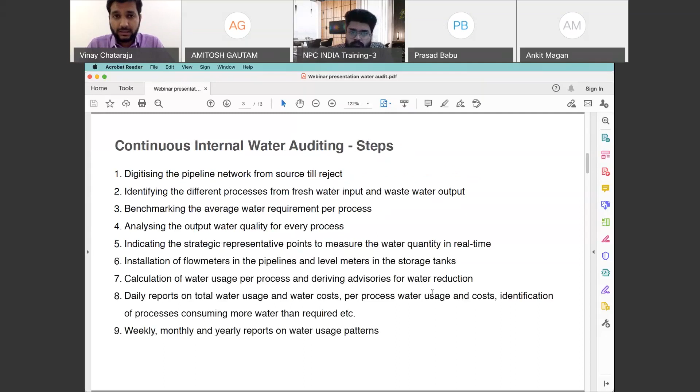So we want the industries prepared and not panic when such kind of regulations come. Those are the reasons why the industry has to do this. So the steps involved in this continuous internal water auditing are many steps, I'll go through them step by step.

So the first step which we feel is a digitizing of the pipeline network. When we have seen the industries, we asked, okay, why are you not monitoring the water?

The piping network itself is very complex, since they haven't constructed the whole industry in one go. They have been upgrading step by step. Ek borewell khatam ho gaya to dusra borewell dig kiya, dusra khatam ho gaya to teesra dig kiya. So they have added more sources, then added a treatment plant, one more unit of boiler, one more unit of power plant. So they have expanded step by step.

So the first and foremost thing we felt was that we need to have a digitized pipeline. What is the source of water, which pipeline is going from which part to which part, to get the data digitally. What is the diameter of each pipe, what is the pump capacity. Everything has to be in digital format to build anything on top of it.

This is usually done with a simple survey. We have approximately taken 7 to 10 days for a medium-sized industry in Kanpur to bring the entire pipeline, from the source to the final output, into a digital format.

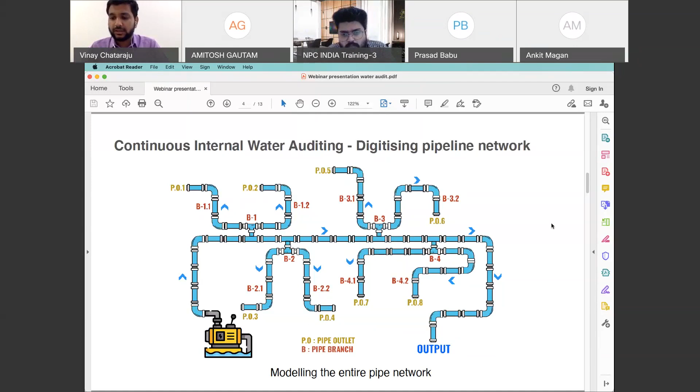Next is classifying the processes. Broadly, what we observed was there are 5 to 10 major processes any industry would have. If it's a very big industry, there would be bigger processes, but maximum 5 to 10 processes. If you take a tannery, it will be like washing, cleaning, pickling, and drying. So there are a few steps involved in it.

So the first thing we need to do is classify each process. This is process 1, process 2, process 3, process 4, process 5, process 6, which are using water in their processes. And clearly segregate this as the input pipeline and this as the output pipeline for this process.

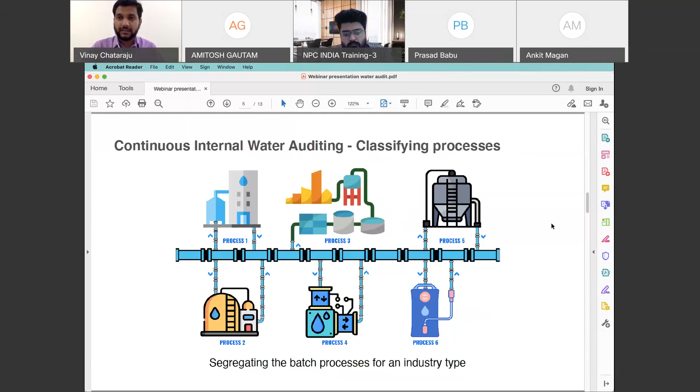This will be completely independent of the industry, so it will be difficult to give a common notion for all industry types. For a tannery it will be different, for a textile, for a paper, for a pharmaceutical, it is all going to be different. So as an industry expert, people will be able to identify how to classify processes.

The next step is benchmarking the water needs. As per the design capacity, since all these processes have evolved over a period of time and the industry has been running for multiple years, they would have some benchmarking for each process. For example, if I take the pickling process in a tannery, for each batch of some XYZ tons of leather, this much amount of water has to be added.

Or for each process in a boiler or in a specific process, we can benchmark approximately that this process is going to use around 10 kl, 20 kl, 500 kl, 100 kl, whatever it is. So we need to benchmark each process: what is this ideally supposed to consume per day if you're talking about daily average?

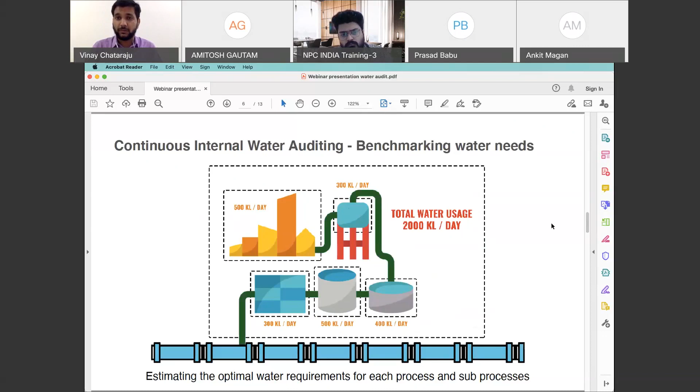This again depends from industry to industry. As industry experts or process experts, we can capture the data and benchmark, saying that ideally, as per our usage, this process is supposed to consume this much. That's what we need to benchmark for water needs. Third, output water quality needs to be measured.

Often different processes release different water quality outside, and they mix all of them into a common treatment plant and try to treat them together. For better reusability of water, we recommend having the output water quality from each process checked, with common parameters like pH, conductivity, DO, turbidity, BOD, COD, or even anions, cations. The overall water quality profile has to be benchmarked for each process.

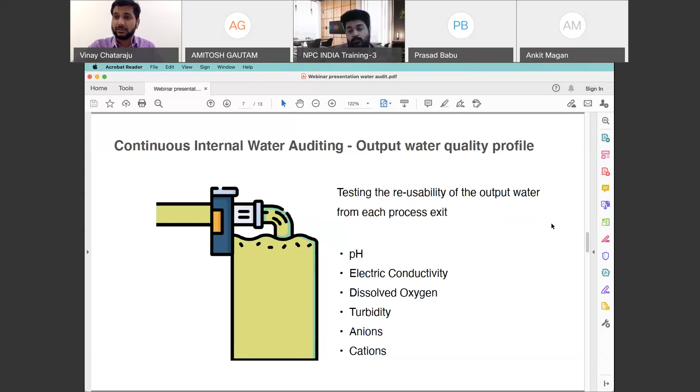Once we have this water quality data, it will be easy to say that this particular process does not have much impurities, or this particular process output can be reused for some XYZ process. So that's what we need to benchmark on water quality. Now, once we have some benchmarking of how much water is required, we need to go for installation of these meters.

So if we install this meter, we need to have this data captured online. We have seen many industries install these flow meters, good quality ones, even international brands like Siemens, ABB, Krohne Marshall, and others.

But what we observed was that they are not able to use the data. The meter is the actual gold mine. The meter is actually the data bomb they are sitting on. We need to have as much fine data from these meters as possible for the analysis.

If we do not capture the data on a daily basis or an hourly basis or as per time intervals, and just calculate the cumulative, this is not going to be of much help for the industry without the finer amount of data. So we keep getting the data continuously.

In some places we have seen people write it manually. They have a logbook, so they come twice or thrice a day and write the readings in the logbook. We observe that they do this analysis once a year or once a month or something, but again, it has not been very efficient.

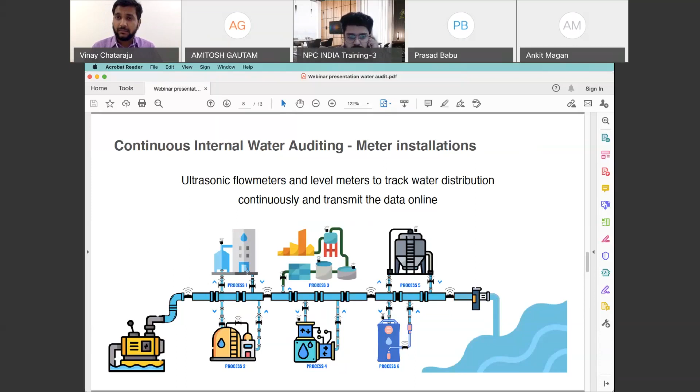So we recommend a continuous online automated data collection process from all the processes wherever the meters are installed. Now it is about the analysis part, so a live dashboard for water budgeting is what we provide.

This data which is being captured from the industry has to be made available to the respective people at the respective times. Again, what we have seen is even big organizations and governments captured the data.

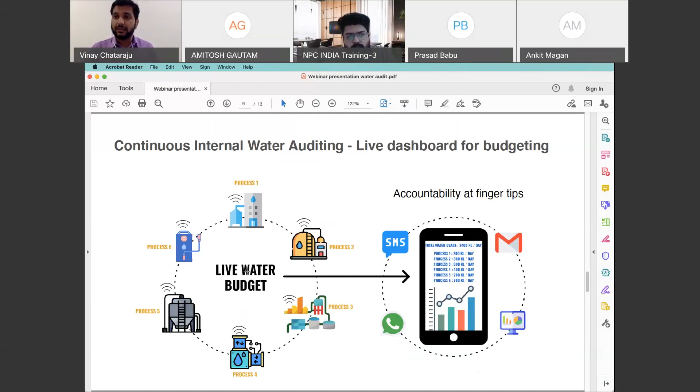Okay, so now we are able to identify the motor needs servicing. So these are the kind of benefits the customers expressed that they are having. So here, finally in the analysis, these are the various things which we capture and then provide.

Total pump working hours every day. The meter which we install, one of the unique propositions we offer, is along with the cumulative flow, we also capture the total working hours. We also identify how much hours the pump was running. So empirically, if not accurately, we are able to calculate what is the cost associated with pumping the water from the submersible or any pump.

So we have the volume, we have the working hours, which tells us at which time to which time the industries are able to work. So in a particular process, it has used 10,000 liters. But at which time? Is there any peak? Is there any peak hour? At a particular point of time, is our consumption so much higher?

So we are able to classify them on the hourly basis, and say that you are using this total for, let's say 5 hours. This instrument was supposed to run for 3 hours, but it ran for, let's say 4 hours. I identify process inefficiencies. What is the inefficiency in each process?

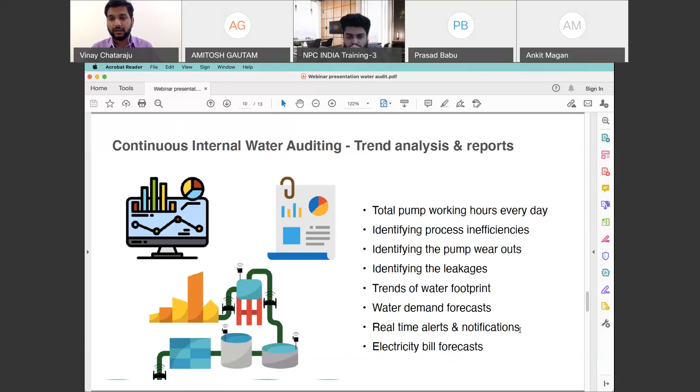Identify the pump wear outs. So it's kind of a debugging unit for the efficiency of the pump. Identify the leakages, trends of water footprint, water demand forecast, real-time alerts and notifications, and electricity bill forecast. Of course, only for the equipment associated with water is what we are looking at in all these analyses.

So these are some of the dashboards, photographs which you can see. As you can see on the left side, we have this WhatsApp portal where we send daily messages directly on WhatsApp, where they can interactively see what is my consumption for, let's say, process 2, process 3, process 4, compiling a report on a daily basis and sending it every day in the morning at 8 o'clock.

Before I start my day, I get a report for my previous day saying your performance for yesterday has been this much. So today you will instruct, okay, there's too much inefficiency happening here, please have a focus on this.

So this is how we do it, and we of course have a web and mobile dashboard, and we also integrate this with any third-party dashboards. Often they have ERP systems or SAP systems which they monitor. So we integrate this data to them so that their process is automated.

Billing, invoicing, and everything. So this is the flow meter which we have developed. Ultrasonic transit time based flow meter. Currently we have 2, 4, and 6-inch diameters available, which are very commonly used pipe diameters for the industrial market. And we have both battery as well as mains operated meters, but generally we recommend battery operated because the mains have chances of tampering. So the battery operated flow meter is called a tamper proof flow meter, which is again recommended by the Central Groundwater Authority to be installed at all bore wells for all industries and all bulk water users.

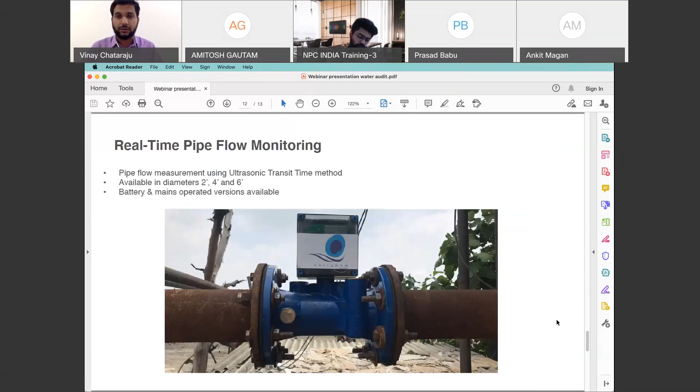So thank you, Mr. Vinay, that was an amazing talk you gave. I'm from an electricity background, and when you compared the water scenario with the energy scenario, I could really resonate with your ideas.

I had this question that in energy we have something similar to what we call economic load dispatch, where you dispatch the amount of electricity based on the demand. It's very optimal, controlled, etc. So now, with my experience in water audits, I have not seen any such system at play simply because there is no data-driven mechanism. Have you explored this area? What is the optimal amount of water that will be extracted from, say, 3 bore wells for 1 day's demand or something like that? It depends completely on the capacity of their borewell, capacity of their pump.

Unlike electricity, here it is completely pump driven. We have seen people running the pumps 24 hours a day from multiple borewells. There are industries who are efficiently working with 2 to 3 borewells, going on turns, basically running for 2 hours and then again for 2 hours. We have seen all types of industries.

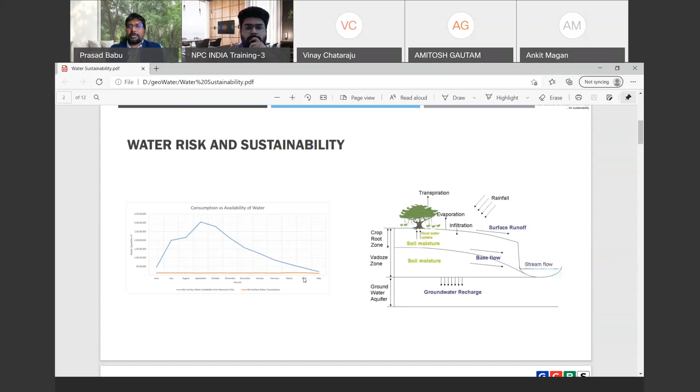So we have to understand that this is a crucial period for the industry to survive in this scenario. This is how we build the scenario.

We don't look at the industry as a single unit. We always look at it from the watershed perspective, such that the industry has competitors - you are not the only one using the particular water resources. You have competitors within the watershed, and you also have other users apart from industries. You also have natural biodiversity, which also requires water, and the environmental flow also demands water. And the aquifer also demands water.

The aquifer is not meant for withdrawing everything that exists in it - it has to be maintained very harmoniously. So what we do is look at the watershed in such a way that we build scenarios by utilization pattern from all angles, not just for current scenarios but also the futuristic scenario.

For example, in this particular chart, you can clearly see the balance available in this particular watershed. Over the period of time, for a few months it looks very great, but for a few months it is in the negative. This doesn't mean the industry is not surviving there, but definitely in the future, the watershed may have a different kind of scenario.

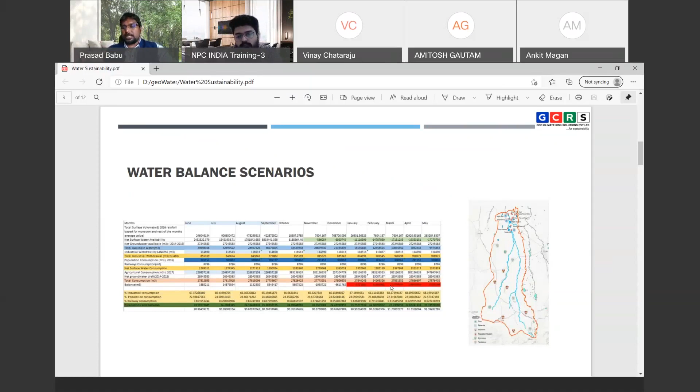I will give a few examples of how we calculate scenarios. Scenario one is, for example, the population water consumption scenario calculated as per the standards the government suggests - 135 LPCD is the standard, but in most parts of India, we don't use 135. Eventually, maybe after 5 years or 10 years, there could be a chance that in that particular watershed, because of changing lifestyle, people may use that 135 LPCD.

In that case, your water availability will be okay for a few months, but for the rest of the months, it will be like putting in some water and taking out the entire complete water.

And the second scenario could be the rainfall. Considering the maximum deviation, if you look at the maximum deviation in most of the drought prone regions of India, you always have deficient rainfall. So that again affects availability of the surface water.

Another scenario we can look at is agriculture, how it is changing over time. In this particular case study, we have seen a shift from traditional crops to commercial crops, which means they demand more water. We cannot ask the farmers to change the crop because you are running an industry, so we have to act in such a way that we look at different formats of the watershed.

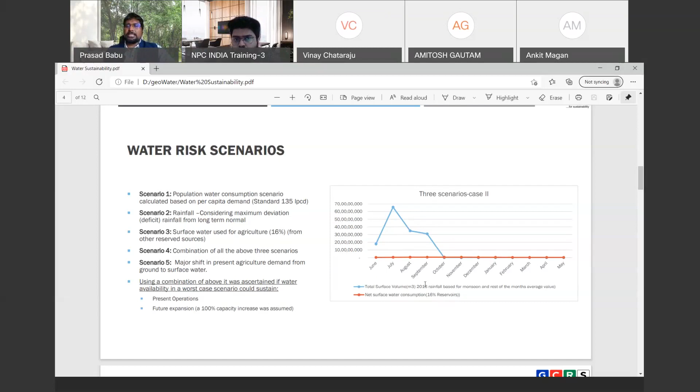If you look at the combination of all these scenarios, as I said in the first slide, for the first few months, like from June to October, the gap between water availability and water utilization is fine. But as soon as it comes to the lean period from October to May, it is almost equal - whatever water is available, either in the groundwater or surface water, there is no positive or negative balance, the gap is almost zero. So we understand every industry or industrial watershed in this manner, so that the industry can survive or sustainability can happen.

Looking at this particular example, one has to plan a water security plan not just within their industrial unit, but also beyond it. As per the ISO standards, we have to look at the water availability in the entire watershed, and how much is utilized by the individual industry as well as other actors within the watershed, like competitors, and look at the balance.

Budgeting is very important too. We have to look at projections for the future, and also the water security plan on the demand side and supply side. While you change the process within the plant, as the previous speaker Vinay said, changing the metering and all that will give more impact within the plant. But you also have to look outside the plant - what is the demand by others, and also what is the supply.

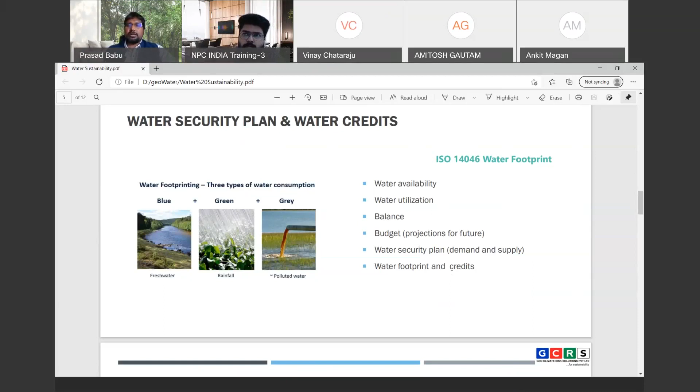So how do we achieve this - one should follow sustainability stewardship. These are the four key drivers we suggest for the industry. One is future proofing, as I said.

Looking at all the business verticals, either in the corporate or within the watershed, they should look at all the elements, not just water, because biodiversity and other aspects of the watershed also give an indication of whether the watershed is surviving or not. So in a way, we have to look at the holistic environment in a watershed.

Looking at the circular economy, like the previous speaker mentioned, reusing and reducing water consumption is always a better option. Importantly, all corporates and industries should have a goal, meeting some of these national and international goals. That will be the key driver, so that you have an agenda in place to help you achieve it. And finally, every industry should have this sustainability stewardship within the industry as well as within the groups.

We can follow a smart approach - you should have a very specific plant, watershed, or ecological approach, and it should be measurable. As I said in my previous slides, every drop available within the watershed, as well as the consumption, should be measurable. Only then will we be able to know whether we will survive or sustain for the future.

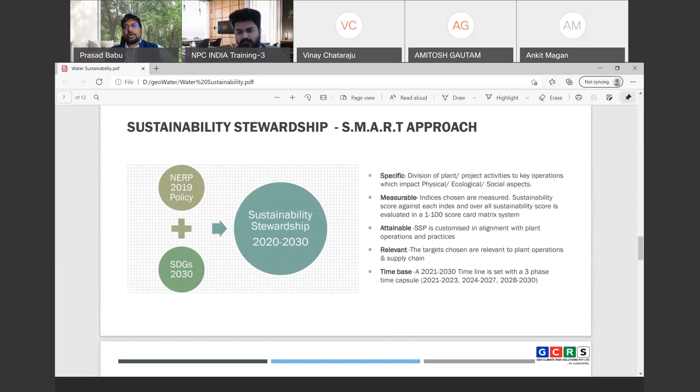Both the government and global indicators, whether it's the national resource efficiency policy by MOF 2019 or the SDGs, all talk about sustainability, and we can always use that as a better approach.

As a company, as introduced by NPC, we are a solution provider in terms of environmental sustainability. We operate within the geospatial spectrum, using geospatial technologies for water conservation and water use efficiency approaches, giving solutions to industry. We are a startup.

This is our journey so far from 2014 to 2020. We are Startup India recognized, and incubated in Andhra Pradesh. We also have an R&D center at IIT Kanpur, and we are GAIL funded. GAIL is our stakeholder. We also have a couple of international MOUs, notably one with Mekorot, the Israeli national water company.

This is our product, how we give solutions to industry. For existing industry, we provide water risk information, as I mentioned in the previous slide, and also sustainability. We develop scenarios through the tool so that industry can look at mitigative and adaptive options within their watershed scenario.

Similarly, for proposed industry, we look at the risk and suitability. If new industries have to come up, we provide suitability information so that they can act accordingly and have an alternative solution.

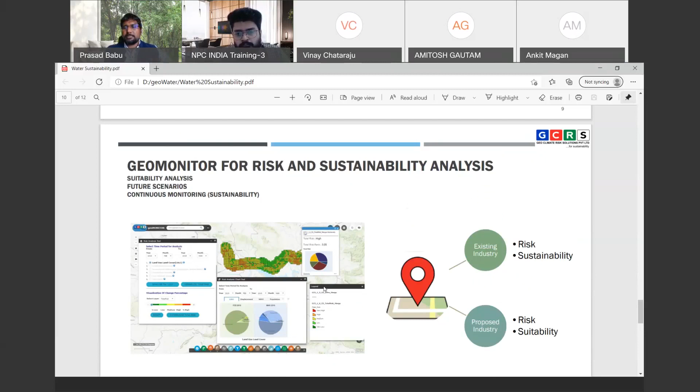This works on a geospatial platform. We bring in a lot of satellite data and other secondary data, and the analytics operate behind the scenes. For every location, we generate smart reports that can be readily used by industry.

We also have another component of the same solution, where the user can directly generate a report as per the Central Groundwater Authority's new notification, covering all 10-11 parameters. The user can easily download the report as and when required, and the data keeps updating.

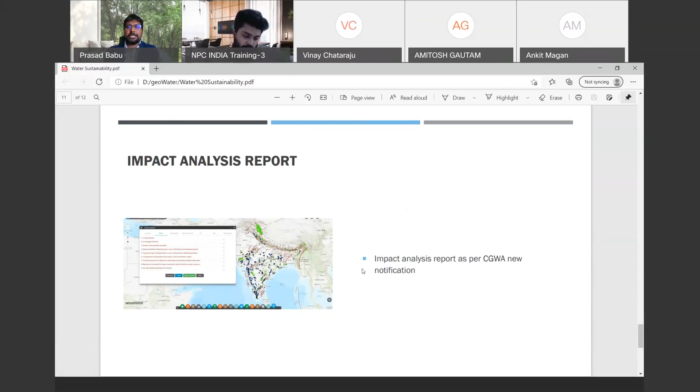Thank you, sir, for your talk. I have one question about the sustainability scenarios you mentioned for proposed industries. Do you do contingency analyses, as in what is going to be the deficit in water supply later on, etc.? Can you shed some more light on that?

As I said regarding deficiency, we understand everything at the watershed level. We build scenarios using historical data to understand the current scenario, and based on historical and current water usage, we build a futuristic scenario, as I mentioned in the case study I presented. In that watershed, we try to understand the future demand by industry under business as usual, and what the future water usage, utilization, and availability could be.

In this particular watershed, historically farmers were growing traditional crops, consuming less water. Now the scenario has changed, they've moved to commercial crops, and I'm sure in the future they will continue growing the same crops, whereas the total water availability remains the same.

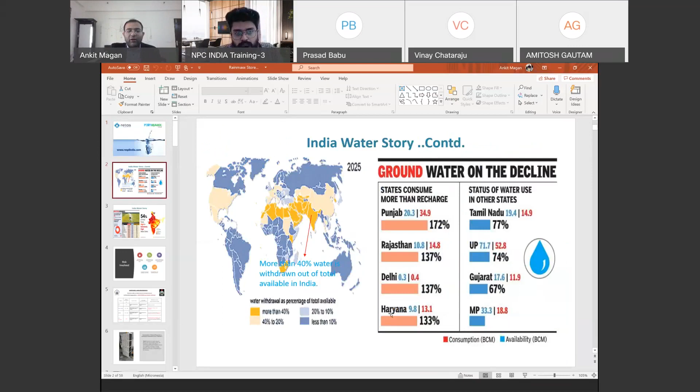So moving on to the presentation, I hope my screen is visible. Yes, sir, it is visible. This is the story, which I'll not spend much time on, because previous speakers have already explained all these things in detail.

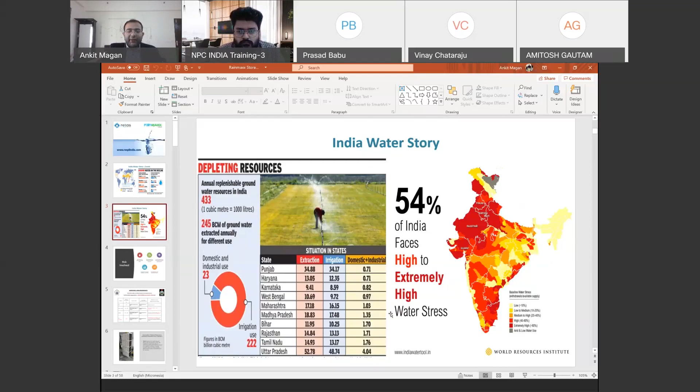As we know, agriculture consumes the maximum amount of water, then industries. There are various practices that NGT has started along with Central Groundwater Board and Ministry of Jal Shakti, where we will have better equipment to reduce water requirement, with various methods to reduce water consumption.

So what is the risk as of date? It's basically groundwater depletion. You won't believe there are a lot of factories in Gurgaon planning to shift to other areas because the water quality has deteriorated and the water level has depleted. Now they are shifting, but they were involved in depleting the water and deteriorating the water quality.

Through rainwater harvesting, few industries were putting back their liquid waste inside the earth. So now the risk is so much that if industries shift, the whole employment and whole cost of the city will change.

Then we are highly dependent on surface water availability, and believe me, it's not a permanent solution. If we are not sustainable today, it's not a permanent solution. There can be day zero in Gurgaon, there can be day zero in Bangalore. Chennai faced day zero, but the number of rainwater harvesting pits that Chennai has is amazing. Since that was not maintained, that is one of the reasons there was day zero.

There's a report which says if 57% of buildings do proper rooftop rainwater harvesting, then there will be no day zero in India.

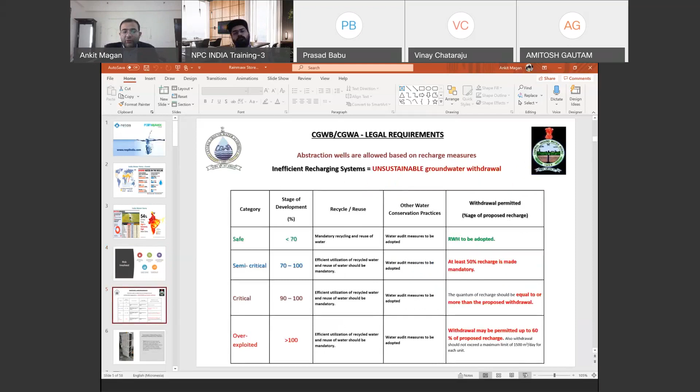So now the change in future rainfall pattern is the worst problem, affecting agriculture. Central Groundwater Board has divided India into zones - now there are 5 zones: safe, semi-critical, critical, overexploited, and notified zone. Wherever we are sitting, it's basically under the overexploited zone.

If you are extracting X liters of water, you have to recharge at least 2X of the water. How is it possible? Because you have limited rain, limited rooftop area, plus the requirement - let's say if you have a paint shop or a textile mill, you have huge requirement.

So what government has proposed is that you can have a rainwater harvesting system within your premises, plus you can adopt various ponds in different villages after getting the Khatauni and Khasra number, and get rainwater harvesting done there. This is the easiest way of doing rainwater harvesting, by adopting a pond, but no one is monitoring the pond and its usage.

That is one of the reasons we were earlier talking about water meters - that needs to be done for all kinds of ponds also, because industries are adopting these ponds, but no one is monitoring the amount of water getting recharged. Either you can have piezometers installed, so at least you will have a basic idea whether we are working in the right direction or not.

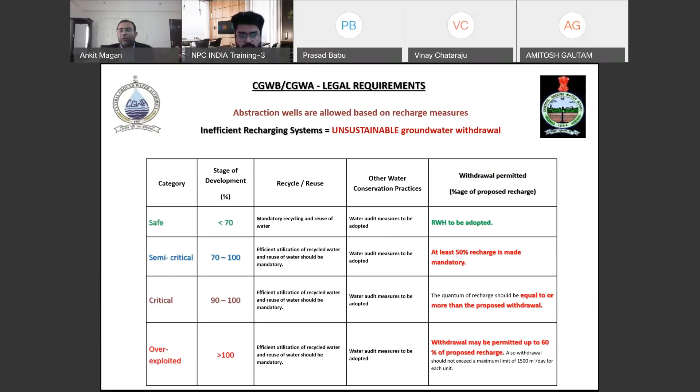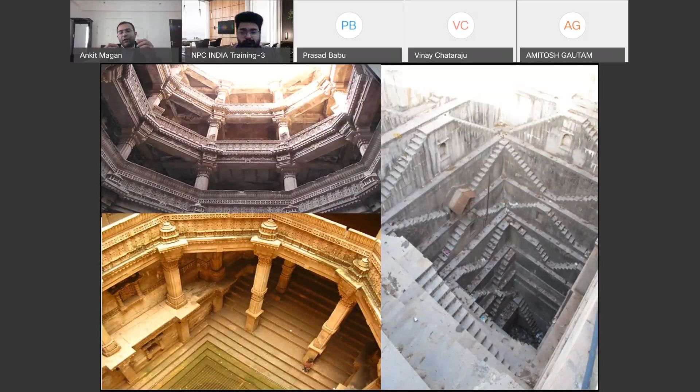Because rainwater harvesting is a scientific topic, and till the time we don't understand the aquifer, we don't understand the strata, there's no point doing recharge. Rainwater harvesting can be stored and reused, can be recharged, can be percolation - it can be anything. In India, we keep on following the recharge system.

But why do we have to recharge? First of all, we are collecting the water, putting it back into the earth, then using electricity to extract the water. Can't we store that water and do local usage instead? But yes, there is a limitation - how much water we can save, how much land do we have.

So these are some beautiful pictures of Bawdi, and a lot of Kunds also, where rainwater harvesting was practiced in a beautiful manner. These number of steps used to tell you how many months of water is available. This was the kind of water audit that was done in that area, in that era.

There were various figures like lion, horse, elephant located at various steps, and they used to tell you - boss, 6 months of water is saved, we can sustain - or if there is scarcity of water, then we need to plan something. So these are some other pictures of various Bawdis.

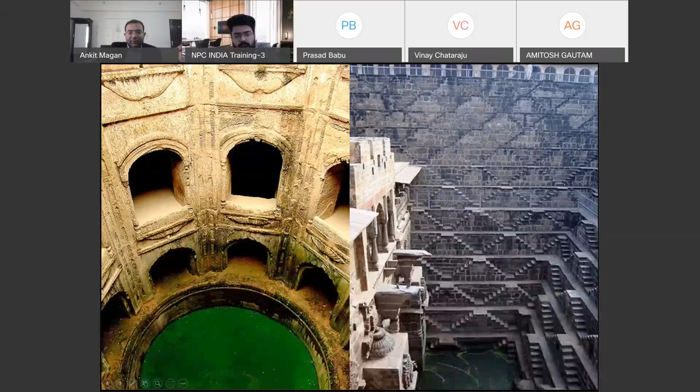This is the conventional section view of conventional rainwater harvesting, where the government says that stormwater has to enter a desilting chamber, where sedimentation takes place, and after that, water enters inside this RCC or brick pit, where we have filtration media of 1.5 meters, which includes boulder, gravel, sand. Nowadays, we use activated carbon also.

So after water enters inside the desilting chamber and sedimentation is done, it finally enters into the rainwater harvesting pit, where because of the void area inside this filtration media, water finally reaches the slotted pipe of the borewell and gets to the aquifer.

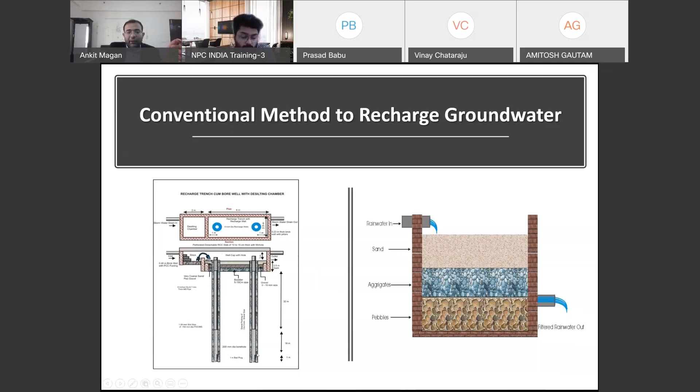So if the RWH pit is not maintained, this is the condition. You won't believe it, but we did a survey in Noida SEZ, and 89% of pits were clogged like this.

So if it's not maintained, then there's no point doing rainwater harvesting. You are actually putting sewer water inside the tank, or putting polluted water inside the aquifer. Then you have to drink that water.

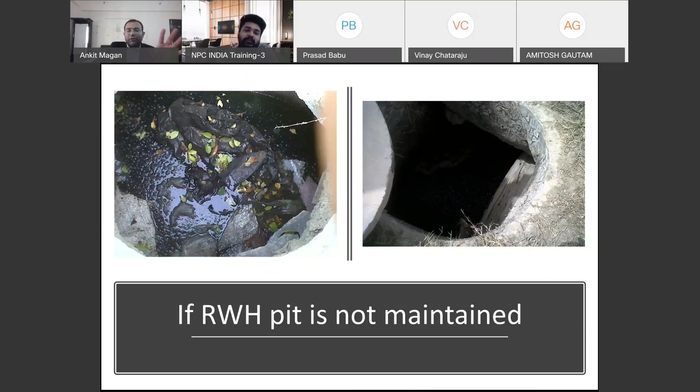So nowadays, when we talk about organic farming and having vegetables in Noida, we don't suggest that this is all fine. There's no organic farming possible near Noida because of the quality of water we have in the nearby area.

So before rainwater harvesting is planned, there are a few questions that need to be answered, because in many places when we meet architects, the usual answer we get is: 1 acre means 1 pit, 2 acres means 2 pits, 3 acres means 3 pits.

Why? We have to know the rooftop area, green area. Every area has its own coefficient. If you have a tin shed roof, it will have a much higher coefficient compared to a normal flat roof. So it's a scientific thing—one has to know the amount of water.

If we are working in Delhi, the rainfall pattern will be different than in Meerut. Talking about Noida, within Noida there are 5 zones. Towards the expressway, if we do a lot of borewells, the recharge rate is very high because Yamuna used to flow in that area. But if we move towards Sector 62 or Ghaziabad, the recharge rate is very low, so we increase the size of the tank rather than increasing the number of borewells.

So first one has to know the rooftop area, green area, paved area, then the drainage pattern. This is very important because we design rainwater harvesting without knowing the drainage pattern—where exactly this needs to be done. If there's a slope on top, you can see the slope, but how the aquifer is flowing in which direction also needs to be known for a larger project. Otherwise one has to know the drainage pattern, soil strata.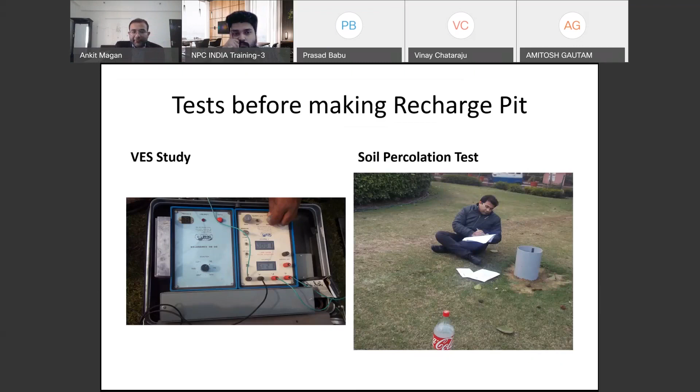Why have we used a microfilter? The reason was simple: we don't want people to clean the rainwater harvesting pit since it's a tedious and costly job. We want the pit to remain as it is for the next 50 years, with no maintenance needed. The only thing that needs frequent cleaning is the microfilter, and a single person can clean it within 5 minutes. It's like cleaning a trash bin - take it out, clean it, put it back, done.

One has to clean the desilting chamber every year. We usually provide a maintenance manual where we tell people how they can clean the desilting chamber within 6 to 7 hours.

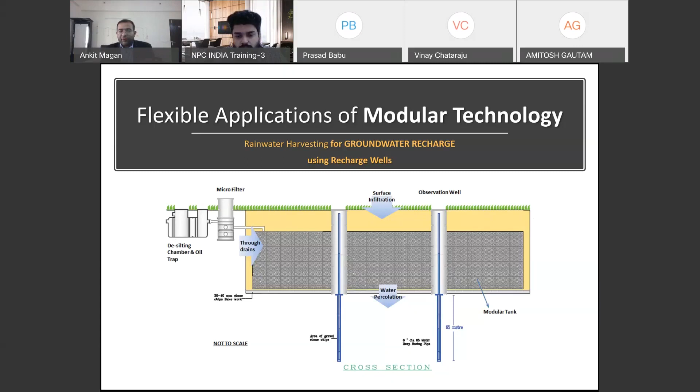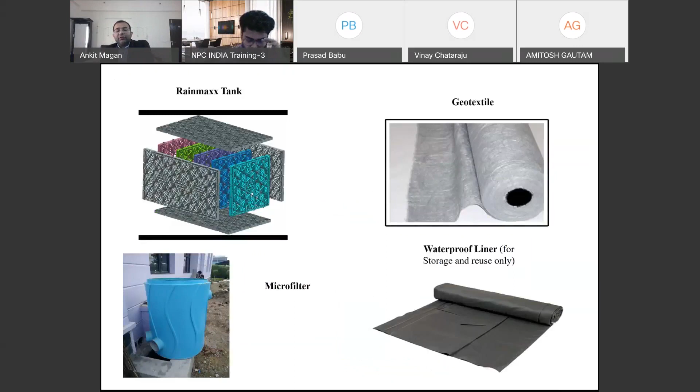So the problem is, let's say you're making a 100 cubic meter pit. Effective storage will be from 40 to 60 cubic meter, because if the invert level of the stormwater drain is 1 meter, then there's a freeboard area which comes, which is of no use, but one has to design the conventional system. Plus 1.5 meter is the filtration bed. So effective storage capacity is only this much.

And in modular, we'll design only this. So imagine, instead of 3.8 meter, we are just designing 1.31 meter for the same capacity. This is where we save a lot of cost and time.

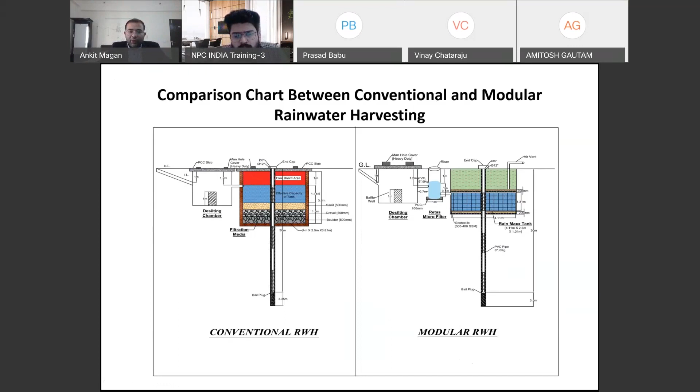So the system can be used for store and use, can be used for recharge, or you can make a drain using the system. This is a beautiful thing - anyhow you will be making a stormwater drain, you'll be making a rainwater harvesting system. What if I can convert your stormwater drain into a harvesting system? You don't require any harvesting system after that.

During construction time, you require a lot of water for curing. Let's make this tank as a storage tank for curing. After the work is done, take it out, put it as a rainwater harvesting tank or a drain, and the material cost will remain the same - this can be used again and again. You want to expand, open it and expand. You want to relocate, open it and relocate the structure.

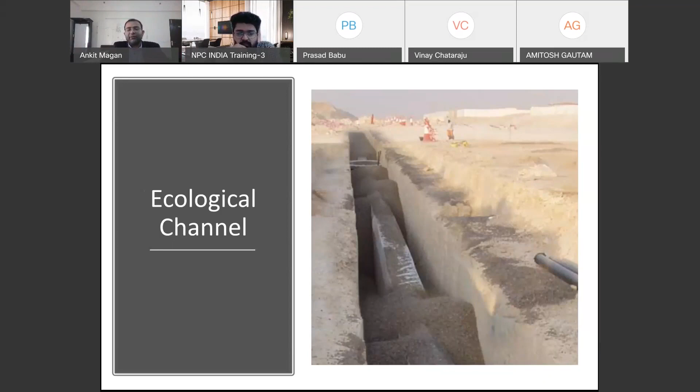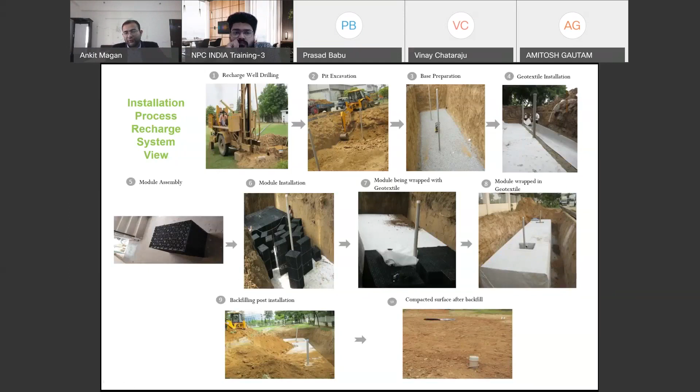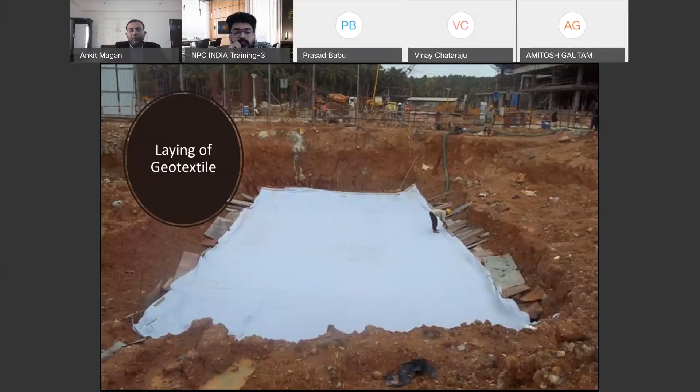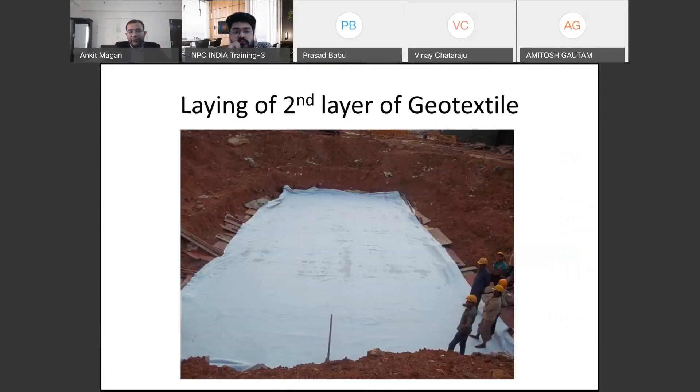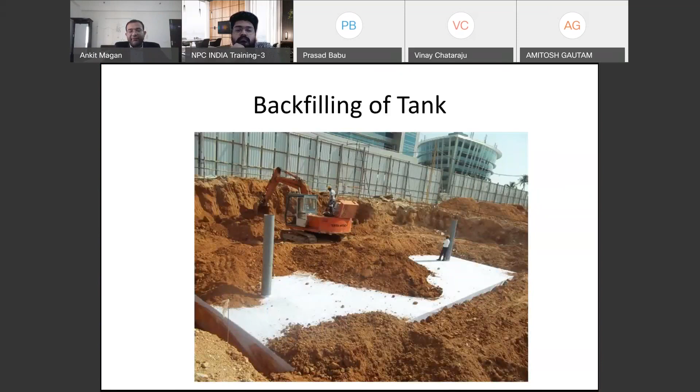In case we are going for store and reuse, we do soling, PCC, then geotextile - no need of borewell. After that we use EPDM liner, then a second layer of geotextile just to protect the liner from reptiles or the edges of the tank. Install the tank, wrap it from all 6 sides, done. You can pump out the water through pipes or chamber. Then we install microfilter and finally the desilting chamber.

This is a 6,50,000 liter tank installed in one of the industries, an FMCG sector industry, where we have installed this tank, and now for 4.5 months they are not dependent on municipal supply or borewell. They are using their rooftop water for their production - imagine the quality of water that they are getting.

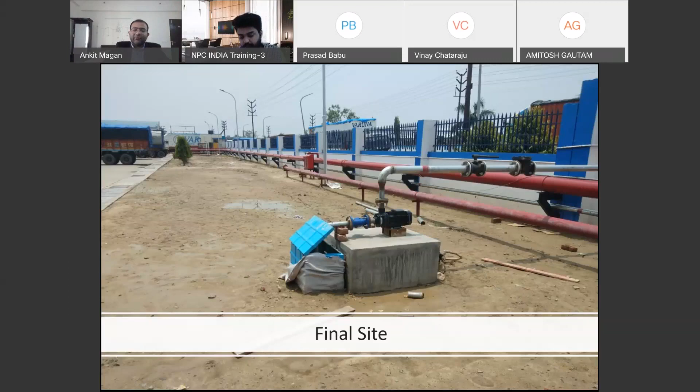These are some of the photographs of site execution. The best thing is the final surface - land, which is so expensive in this era, so the top surface can be used for parking, driveway, landscaping. You'll not come to know that there is any rainwater harvesting pit below this. The only thing you are going to see is this one round filter and a desilting chamber manhole, nothing else.

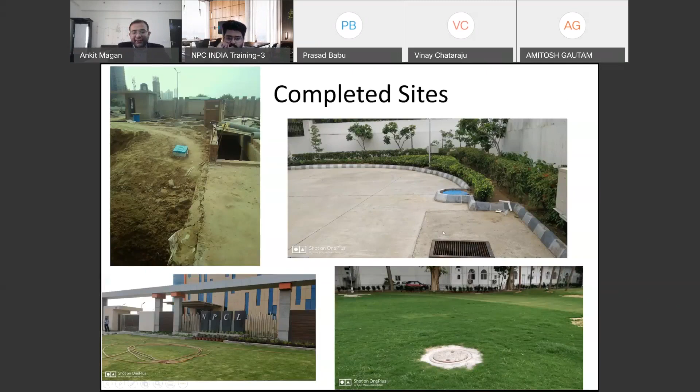This is a comparison - this is work that we completed in Noida for Siemens, and here you can see the difference. The cost of conventional was 33.7, whereas the cost of modular was 18.46.

We completed this work in 10 days. The time given to us was to complete this within a month, and we completed this project including civil work in 10 days. So you can see the difference. The length and width were same, the only difference is the height, and this is a huge difference - 1.31 and 5.31, this is a huge difference.

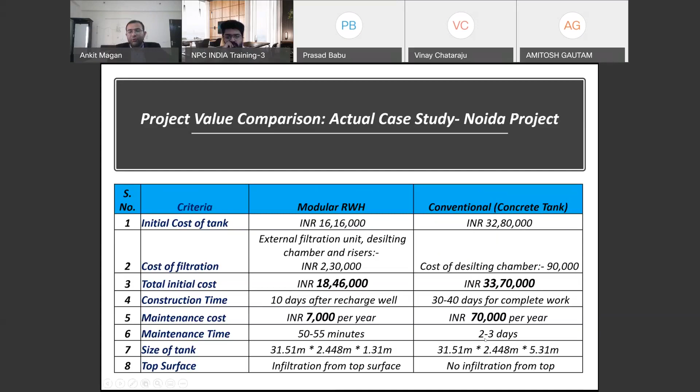These are some of the other advantages. It's safe, it's load bearing, time required is less. You get extra points for using the material.

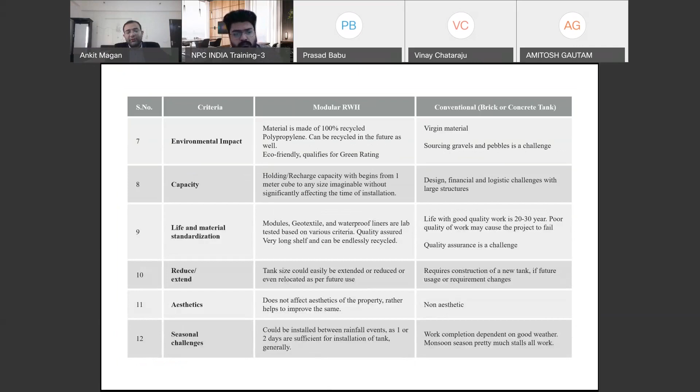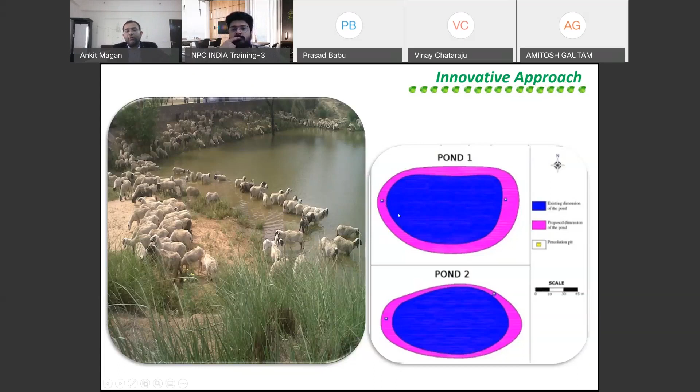Other thing is, when we talk about pond systems - let's say there's a village with a pond that was used for rainwater harvesting. We select that pond, measure the area as per the colony. If it's a sewerage pond or grey water coming into the pond, we divert it to the central STP system or the line going to STP, and all the rainwater of that area is diverted to this pond. The depth of the pond is increased, it's cleaned, and we install a conventional RWH system on the field of the pond at a certain height, so minimum water is always available for animals or daily usage, but not for washing - maybe for fishing and other things. During rainy season, when they face flooding, the overflow of this pond will enter the rainwater harvesting pit.

At the periphery, we install a conventional rainwater harvesting system, and if required, we install a piezometer if it's a non-CSR project.